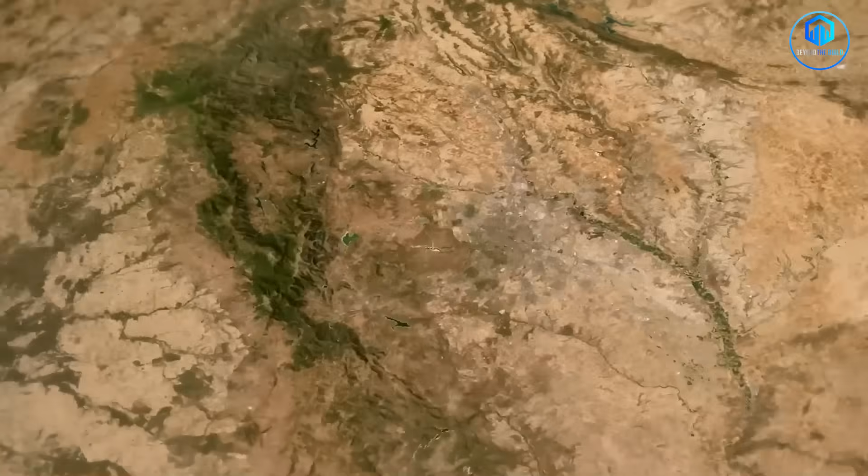Imagine stepping onto a high-speed train in Madrid and arriving in Casablanca just hours later. No flights, no ferries, just solid ground beneath your feet as you travel between two continents. This isn't fantasy. Spain and Morocco are bringing back one of the world's most ambitious tunnel projects, a $10 billion underwater passage that could change everything we know about travel between Europe and Africa.

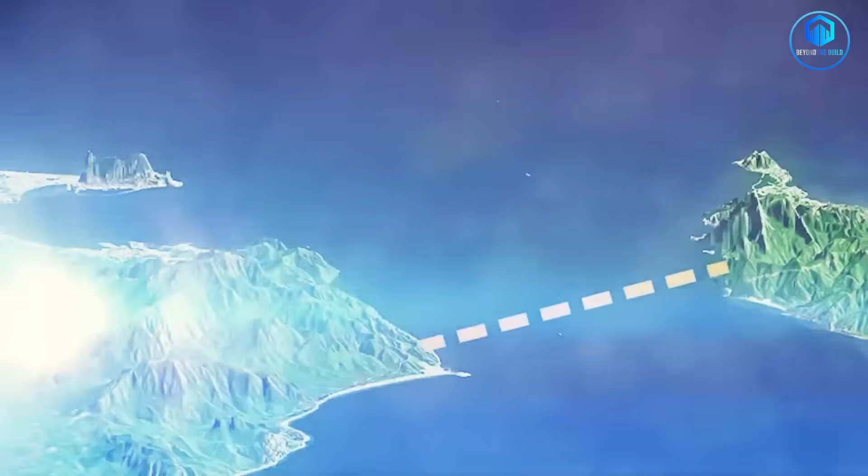Picture this, you're 475 meters beneath the Mediterranean Sea, deeper than the Empire State Building is tall. Above you, massive cargo ships cross one of the world's busiest shipping lanes. Around you, rock formations that have witnessed the collision of continents for millions of years. This is where Spain and Morocco want to dig the most challenging tunnel ever attempted.

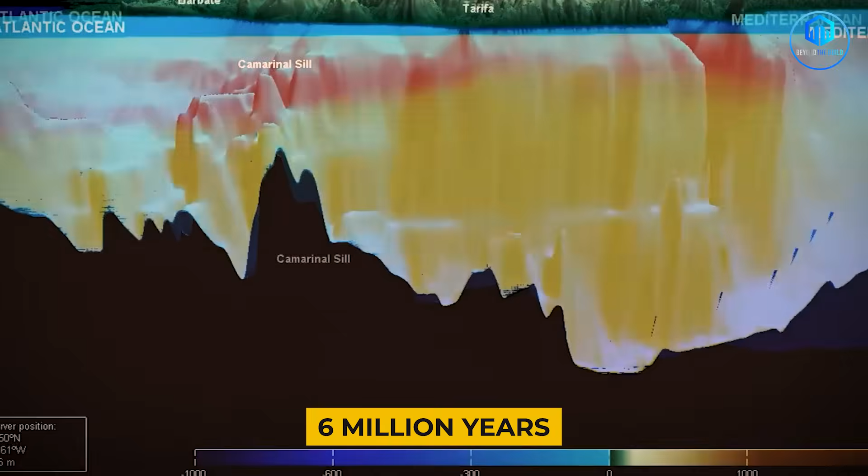The Gibraltar Strait sits at one of Earth's most geologically violent intersections. For the past 6 million years, the African and Eurasian plates have been grinding against each other here, creating a landscape of underwater mountains, deep trenches, and fault lines that stretch for hundreds of kilometers. The water itself tells the story. Atlantic currents flowing east meet Mediterranean currents flowing west, creating an underwater battlefield of competing forces.

Every day, over 300 ships navigate these waters. Oil tankers from the Middle East, container vessels from Asia, cruise ships packed with tourists. The strait ranks among the world's busiest shipping lanes, though it represents a smaller fraction of total global maritime traffic. Any tunnel must somehow coexist with this constant parade of massive vessels overhead.

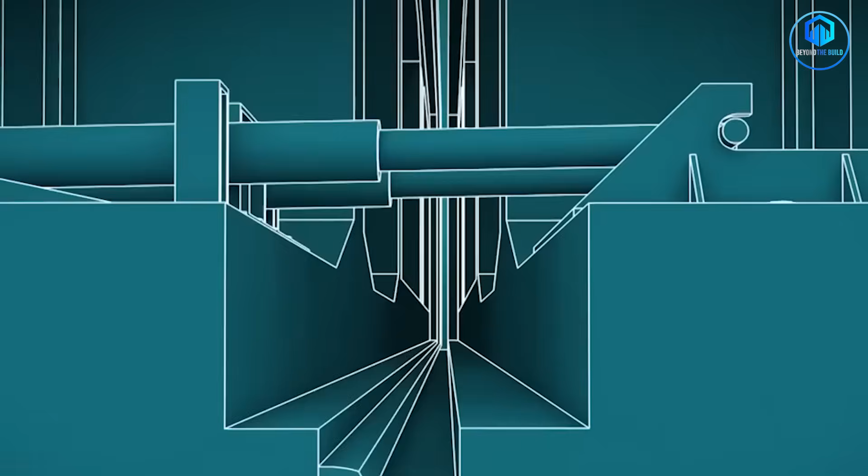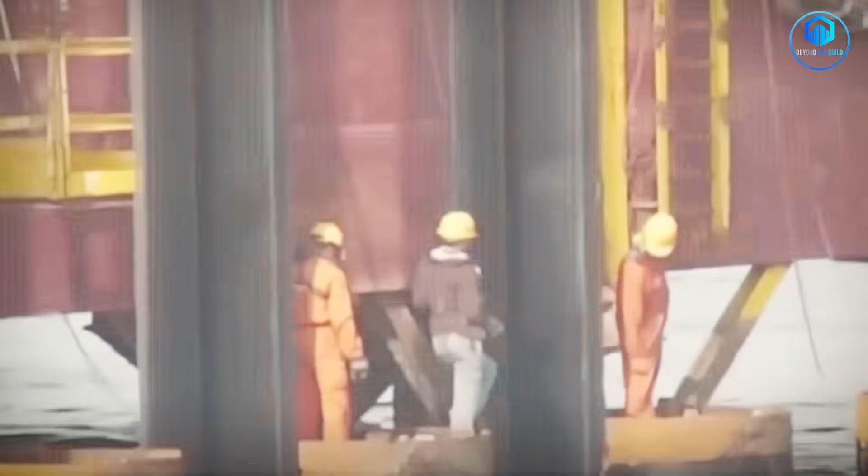The Gibraltar Strait Tunnel isn't new. Engineers have dreamed about connecting Europe and Africa since the 1930s. Back then, Spanish researchers discovered something that killed the project immediately. The rock beneath the strait was so hard that their equipment couldn't even scratch it. The geological surveys revealed layers of limestone and dolomite compressed over millions of years into formations harder than concrete.

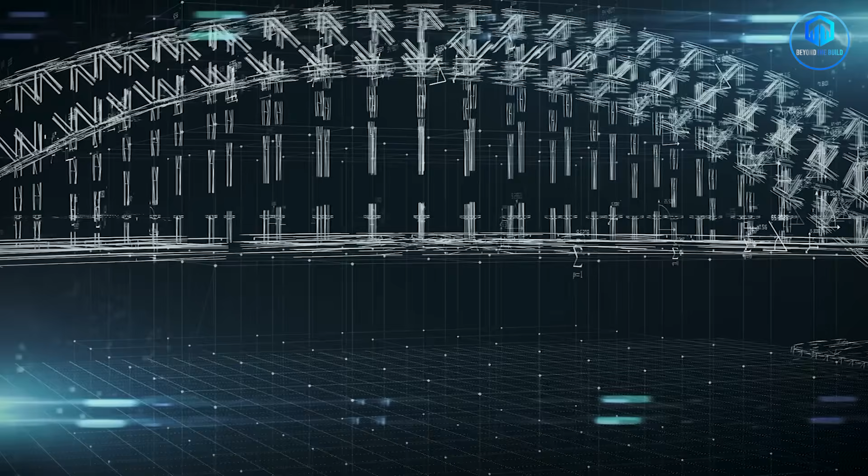Early planners considered alternatives. Some proposed a floating bridge with towers reaching nearly a kilometer into the sky. Others suggested an immersed tunnel, prefabricated sections lowered into a trench on the seafloor. Every option faced impossible challenges. The depths were too extreme. The seismic activity too unpredictable. The marine traffic too dense.

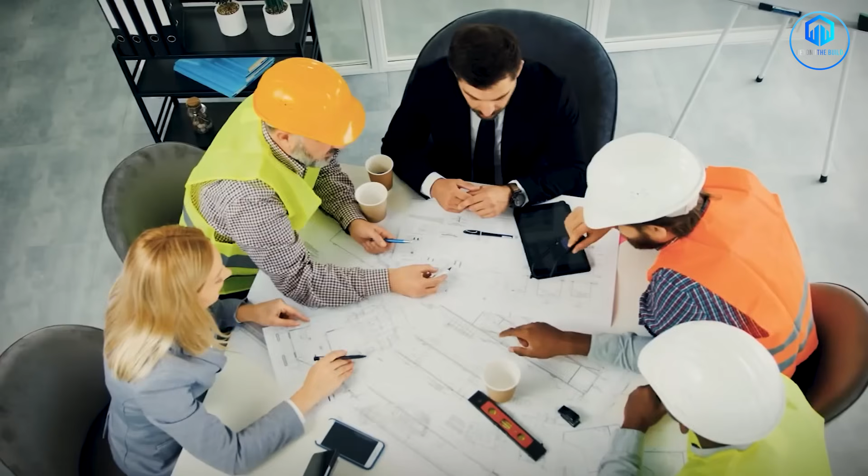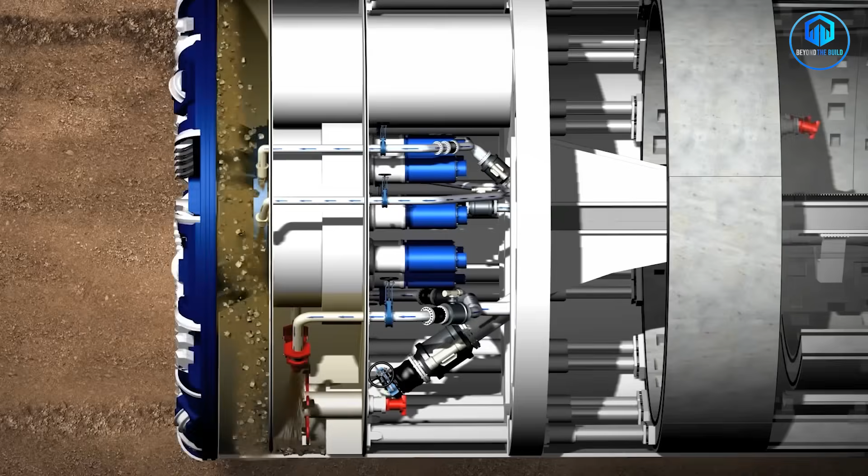They gave up. But nearly a century later, the dream is back, and this time they might actually have the technology to make it happen. Modern tunnel boring machines can cut through rock formations that would have destroyed 1930s equipment. Computer modeling can predict geological conditions with precision that early engineers couldn't imagine. Most importantly, successful underwater tunnels now exist as proof that the impossible can become routine.

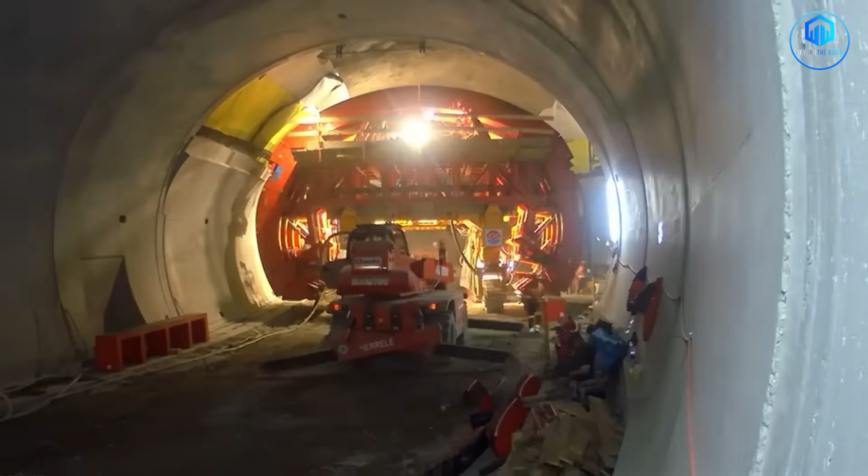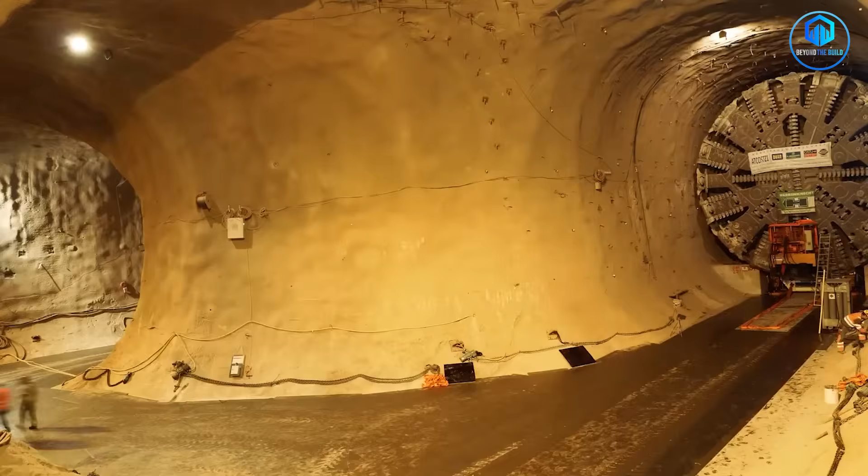Here's what makes this project absolutely insane. The English Channel Tunnel, which everyone calls impossible when it was built, sits just 75 meters below sea level. The Gibraltar Tunnel will go 6 times deeper at 475 meters maximum depth. While the Channel Tunnel dealt with soft chalk that was relatively easy to dig through, Gibraltar forces engineers to bore through some of the hardest rock on Earth.

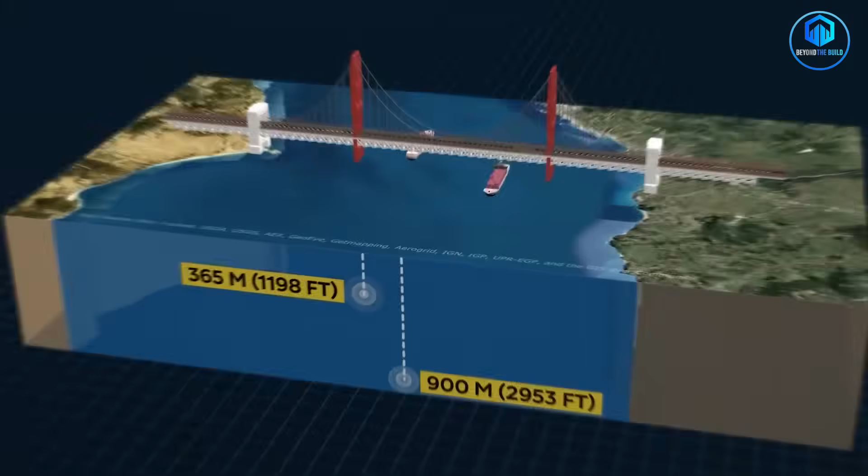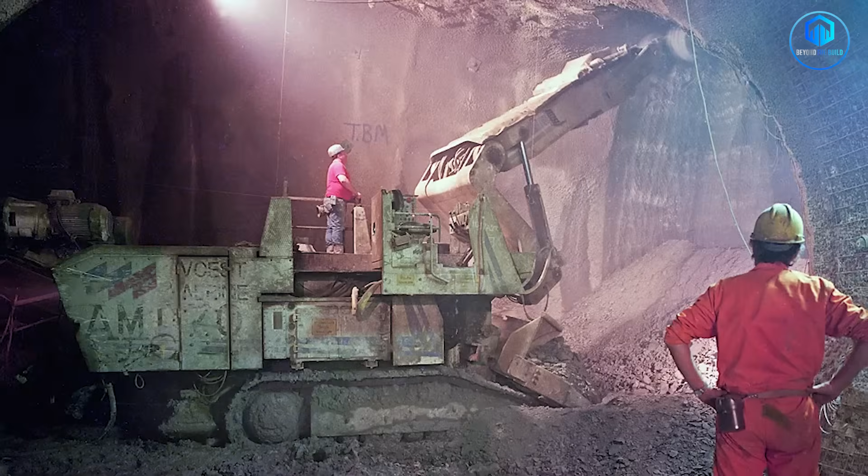The strait itself reaches depths of 900 meters, but the tunnel route carefully avoids these deepest sections. The numbers are staggering. 2 parallel tunnels, each around 28 kilometers for the underwater section, with total tunnel length reaching 38 to 42 kilometers, including land approaches. That's like building the Channel Tunnel underwater, but making it shorter while going much, much deeper.

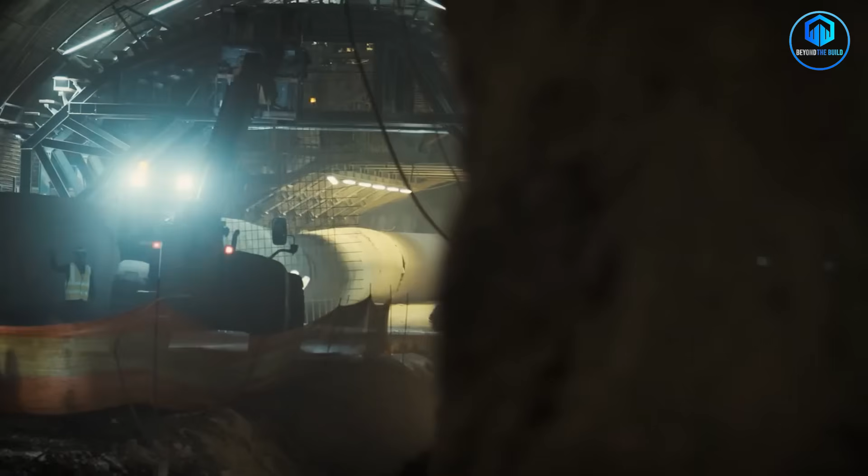The maximum depth hits 475 meters below sea level, deeper than most skyscrapers are tall. At those depths, the rock pressure is enormous. The temperatures climb higher than surface levels. Every meter forward becomes a battle against the planet itself.

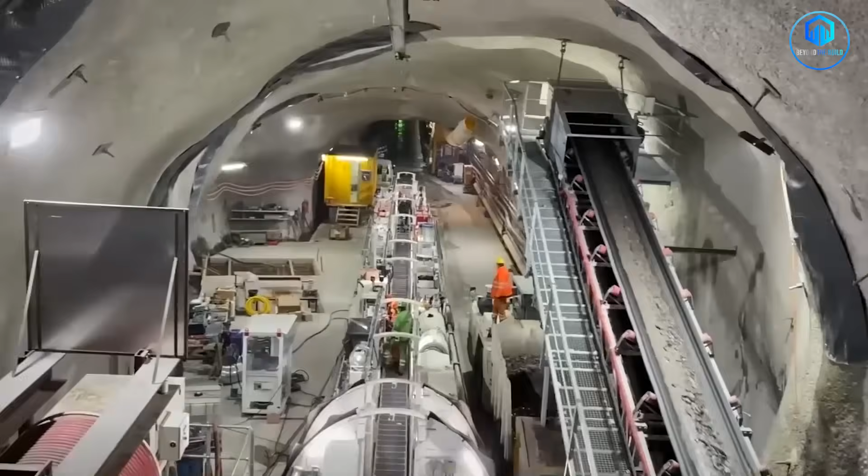Engineers estimate they'll need to excavate millions of cubic meters of rock and sediment. That's enough material to fill thousands of Olympic swimming pools. All of this debris must be transported to the surface through shafts that themselves represent major engineering challenges. The logistics alone boggle the mind.

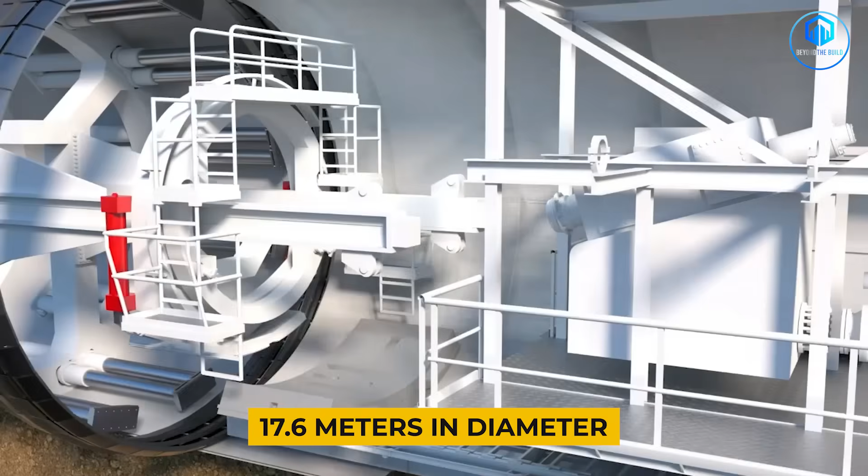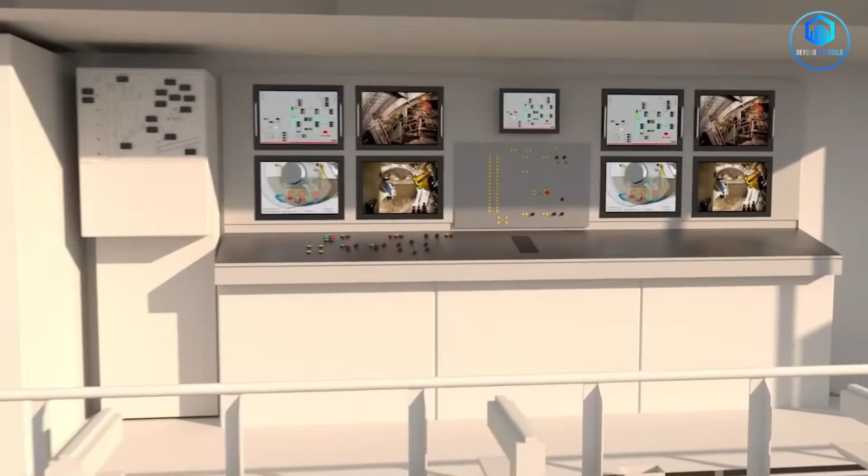The tunnel boring machines required for this project will be among the largest ever built. Current technology maxes out at around 17.6 meters in diameter for the largest machines currently in operation. Gibraltar's planned tunnels will use machines measuring approximately 7.9 meters in diameter, large but within current technological capabilities. These mechanical beasts would still weigh thousands of tons and cost hundreds of millions of dollars each.

But depth isn't even the worst problem. The Gibraltar Strait sits on one of Europe's most dangerous geological features, the Azores-Gibraltar Transform Fault. This isn't just any crack in the earth. This massive fault system stretches over 600 kilometers from the Azores Islands to the coast of Morocco. It represents the active boundary where three tectonic plates, African, Eurasian, and Iberian, meet and grind against each other.

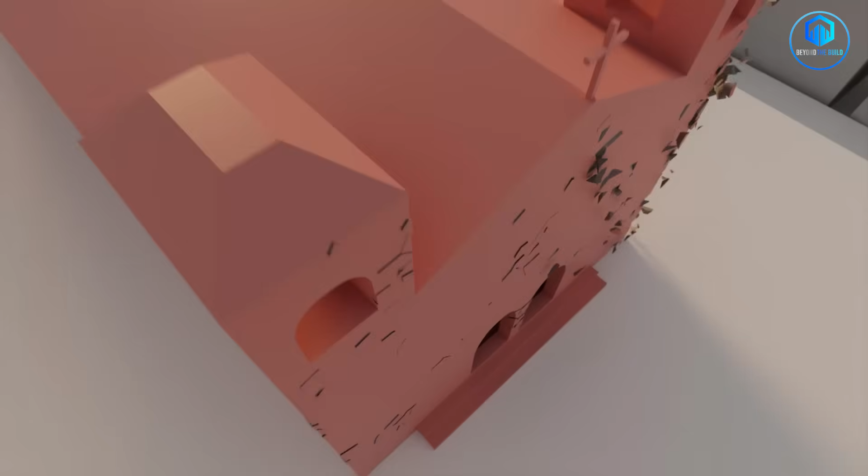This fault line produced the devastating 1755 Lisbon earthquake, one of the most powerful quakes in recorded European history. Contemporary accounts describe church bells ringing across Europe from the vibrations. The tremor was so massive that people felt it as far away as Hamburg and even Finland. Lakes in Scotland reportedly sloshed back and forth for hours after the main shock.

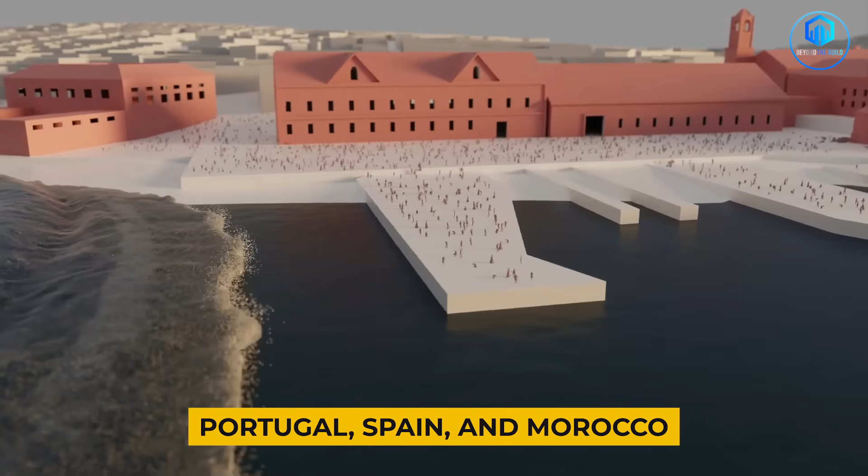The resulting tsunami wiped out entire coastal communities across Portugal, Spain, and Morocco. Wave heights reached 15 meters in some areas, taller than a 4-story building. The port city of Lagos in Portugal was partially destroyed, and Lisbon's royal palace disappeared beneath the waves. Modern estimates suggest between 40,000 and 50,000 people died across the region, though some reports put the toll even higher. The fault remains active today.

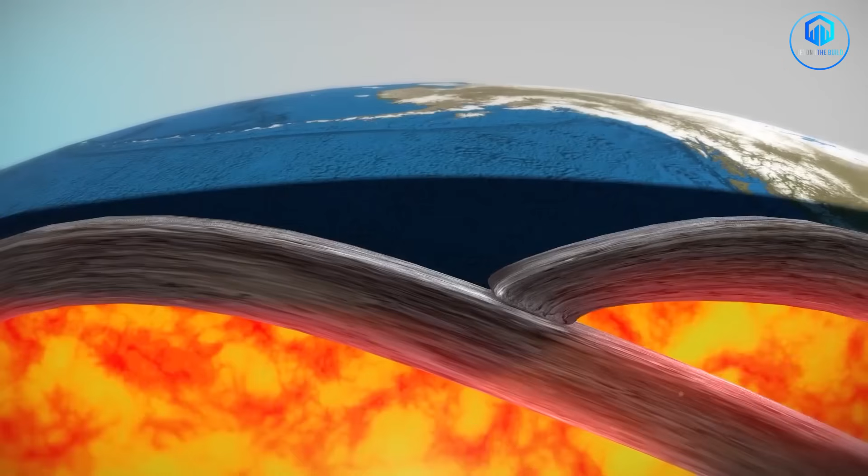Seismic monitoring stations track regular movements as the African and Eurasian plates slowly grind against each other at about 4 millimeters per year. That might sound tiny, but over the decades it takes to build a tunnel, those forces add up.

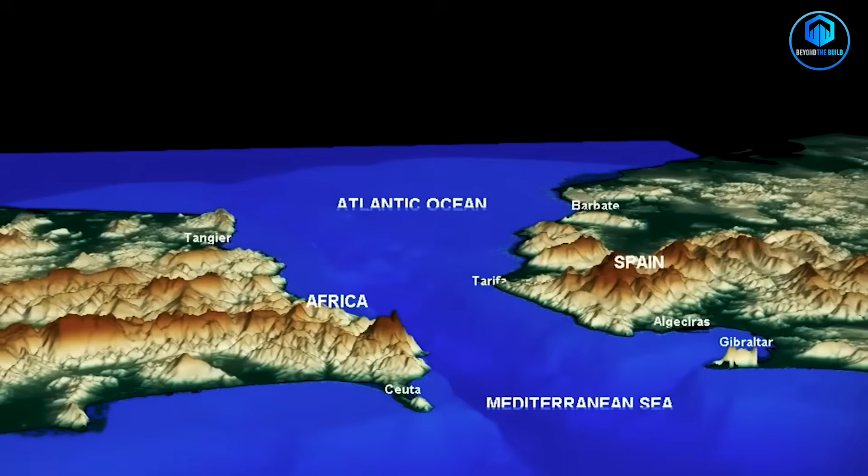Then there's the water problem. The strait connects two different seas, the Atlantic Ocean and the Mediterranean Sea. Cold Atlantic waters constantly flow eastward, while warm Mediterranean waters flow westward, creating powerful underwater currents that reach speeds strong enough to knock diving equipment off course. Building tunnel sections in these conditions requires precision never attempted at such depths.

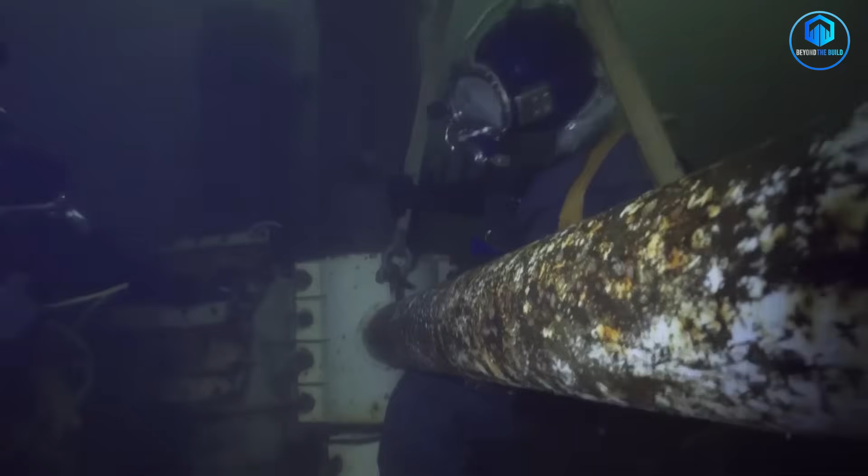Marine life adds another layer of complexity. The strait serves as a critical migration corridor for whales, dolphins, and countless fish species. Sperm whales dive to depths of 1,000 meters here, hunting for giant squid in the deep trenches, and pilot whales travel in pods of hundreds. Any construction activity must account for these sensitive ecosystems.

The underwater topography resembles an alien landscape. Steep underwater cliffs drop into abyssal plains, and rocky pinnacles rise like underwater mountains. The Camarinal Sill, an underwater ridge that separates the Atlantic from the Mediterranean, reaches depths of only 280 meters at its shallowest point. This ridge controls the water flow between the seas and represents one of the most challenging sections for tunnel construction.

Spanish and Moroccan governments officially launched this project back in 1979 when their kings signed an agreement to strengthen relationships between Europe and Africa. Two state companies formed, SECEGSA in Spain and SNED in Morocco. They spent millions on studies throughout the 1980s, but by 2009 the project died again. Too expensive, too risky, too complicated.

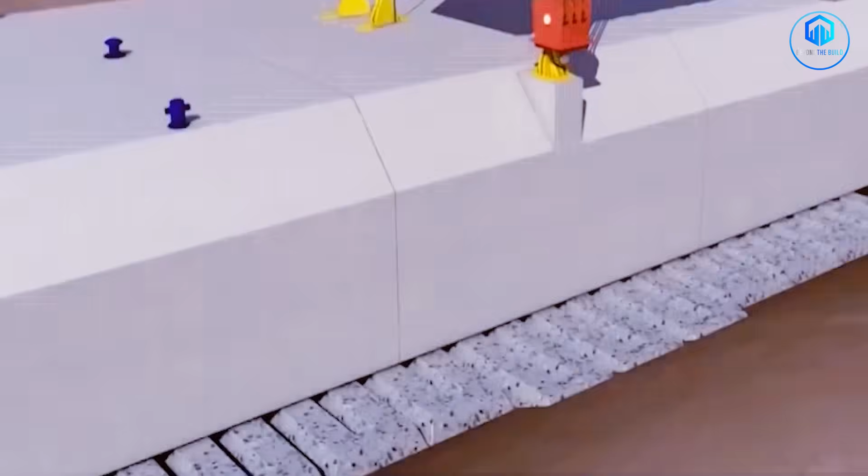What changed? The 2030 World Cup. Morocco, Spain, and Portugal will co-host the first World Cup ever held across 2 continents. Suddenly, connecting Europe and Africa by land became more than an engineering fantasy. It became a political necessity, tourism revenues, national pride, global attention. However, the tunnel will not be ready for the 2030 World Cup. Current projections put completion at 2040 or later.

The numbers are compelling. FIFA estimates that the 2030 World Cup could attract over 5 million international visitors across the 3 host countries. Traditional travel between Spain and Morocco involves either flying or taking ferries across the strait. Flights require airport transfers, security delays, and weather-dependent schedules, while ferries take 35 minutes for the crossing but require additional time for vehicle loading and port procedures.

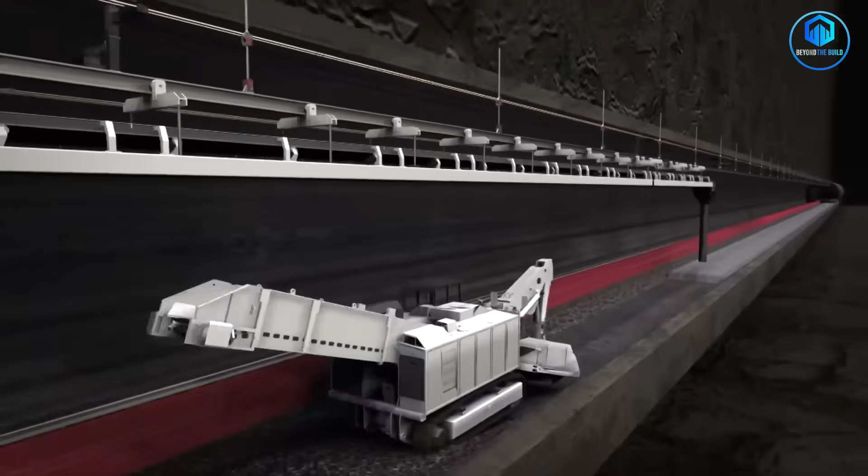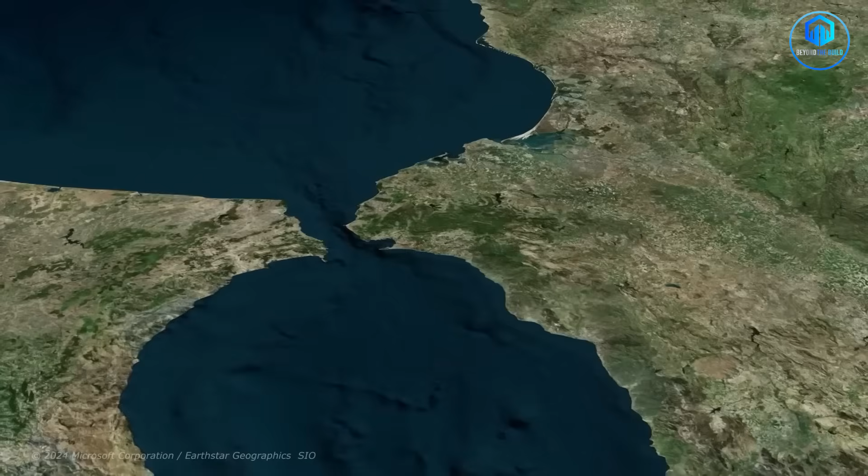While the tunnel won't serve the 2030 World Cup, the tournament has created political momentum for the project. A high-speed rail tunnel would eventually revolutionize travel patterns between the continents. Journey times from Madrid to Casablanca could drop to under 4 hours, competitive with flying when you factor in airport delays.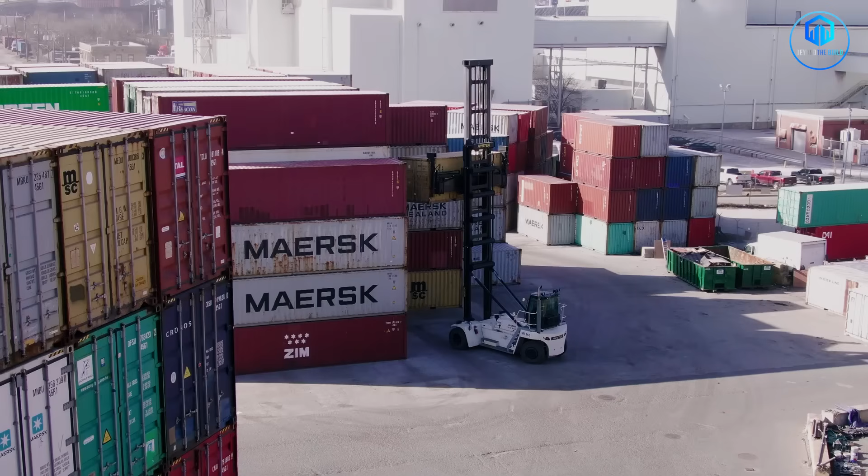The economic impact extends far beyond tourism. Spain and Morocco have been strengthening trade relationships for decades. Morocco now ranks as Spain's fastest-growing trade partner in Africa. Spanish companies have invested heavily in Moroccan automotive manufacturing, renewable energy, and telecommunications. A direct rail link would accelerate these trends dramatically.

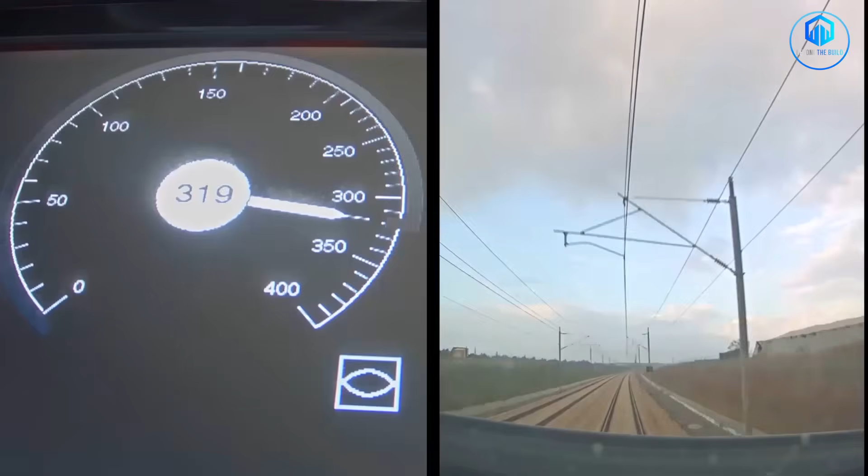Morocco's high-speed rail system changes everything. In 2018, Morocco launched Al Boraq, Africa's first high-speed train. These sleek machines hit 320 kilometers per hour, connecting Tangier to Casablanca in just over 2 hours. The journey that once took nearly 5 hours by conventional rail now happens faster than most people's morning commute.

Al Boraq represents more than just fast trains. The entire system was designed with European integration in mind. The trains use French TGV technology adapted for Moroccan conditions. The electrical systems operate on the same standards as Spain's high-speed network, and even the track gauge matches European specifications perfectly.

The investment was massive, over $2 billion for the initial 200-kilometer line, but the results speak for themselves. Al Boraq has transported over 6 million passengers since opening, with ridership growing steadily each year. Business travelers now routinely commute between Morocco's major cities, and tourists can easily visit multiple destinations in a single trip.

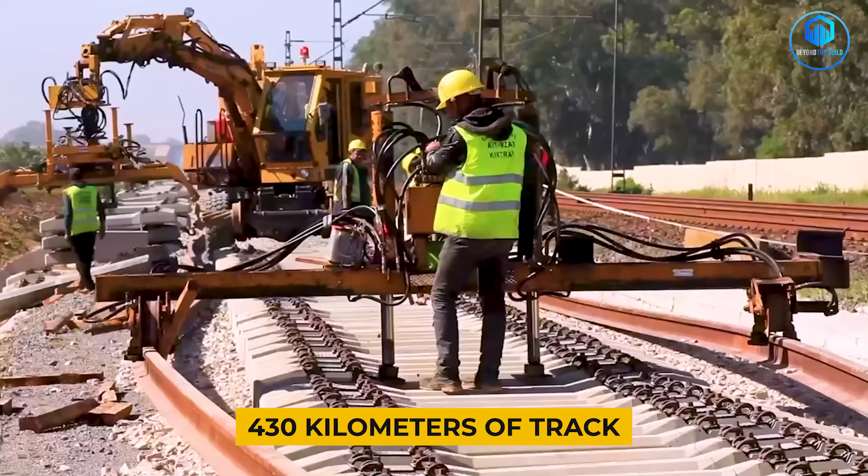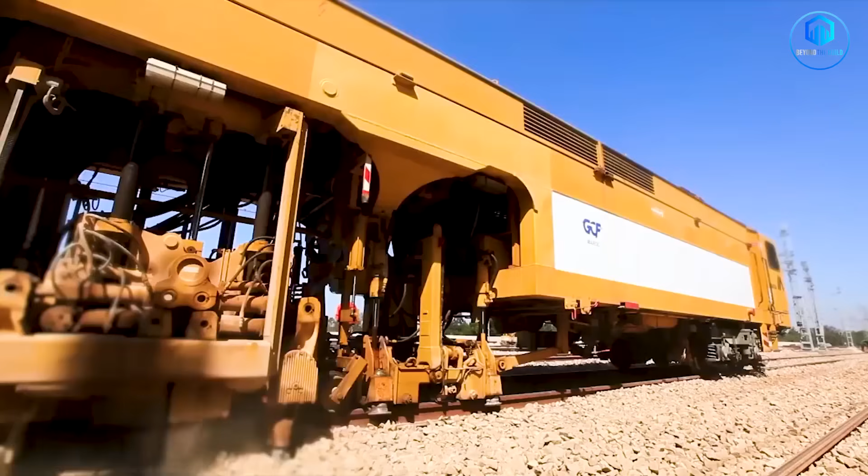Current expansion plans are even more ambitious. Morocco is extending the high-speed line south to Marrakesh by 2029, adding another 430 kilometers of track. Eventually, the network could reach all the way to Agadir on the Atlantic coast, creating a 1,500-kilometer high-speed rail system spanning the entire country. Al Boraq uses the same electrical systems and track gauge as Spain's high-speed network.

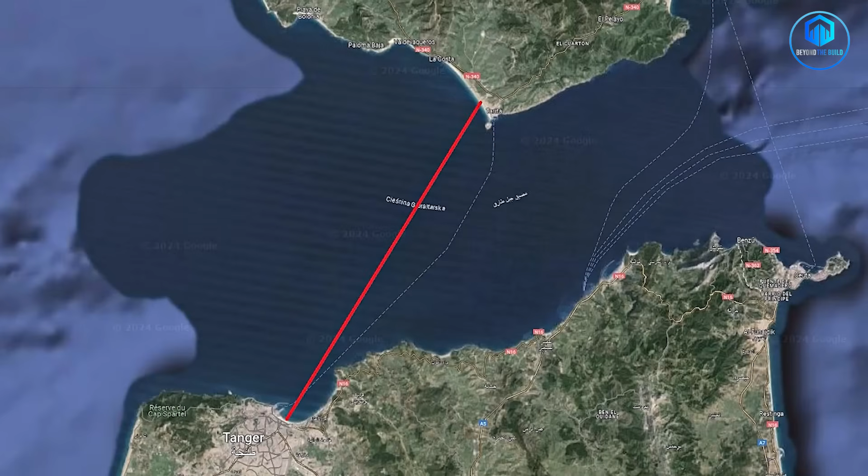That's not a coincidence. Moroccan planners always intended their trains to eventually cross into Europe. The infrastructure already exists on both sides—the tunnel just needs to connect them. Current plans call for the tunnel to link Punta Paloma in southern Spain with Malabata near Tangier in Morocco, avoiding the deepest parts of the strait while providing the shortest possible crossing. Trains would carry both passengers and vehicles, similar to the Channel Tunnel's shuttle service.

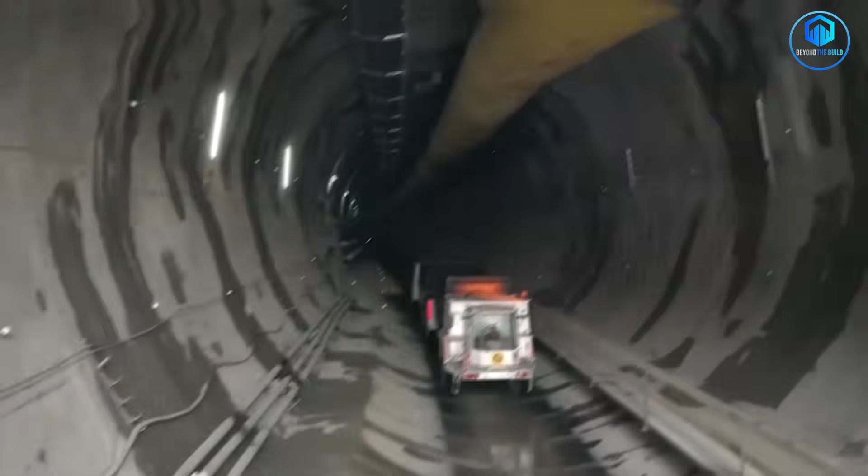But let's talk about what this really means. The tunnel would create the first permanent land connection between Europe and Africa since the continents separated millions of years ago. Trade routes that currently depend on slow maritime shipping could switch to rapid rail transport. A container leaving Morocco could reach Berlin faster than current sea routes reach London.

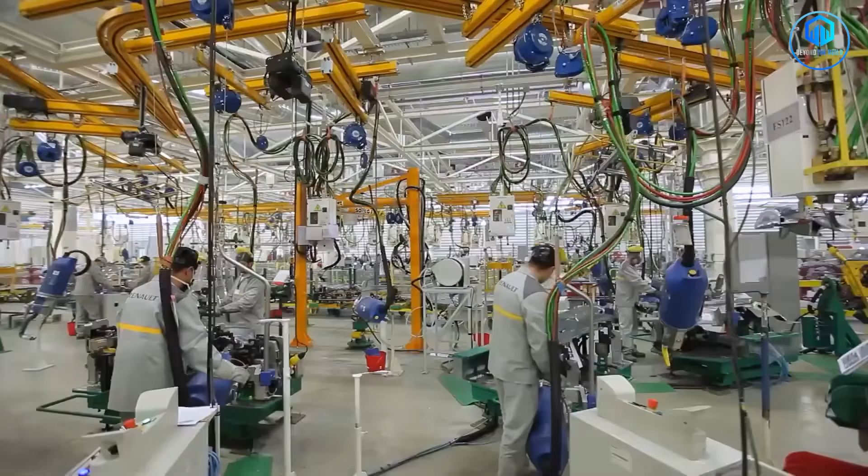The economic possibilities are massive. Morocco serves as a gateway to all of Africa. The country has become a major automotive manufacturing hub, producing car parts for European brands like Renault, Peugeot, and Ford. Moroccan factories now export over $10 billion worth of automotive products annually. With a direct rail link, these factories could integrate even more closely with European supply chains.

Agriculture represents another huge opportunity. Morocco produces citrus fruits, vegetables, and other crops that European markets demand year-round. Currently, these products travel by truck to ports, then by ship to European destinations. A rail tunnel could cut transport times dramatically while reducing costs and environmental impact.

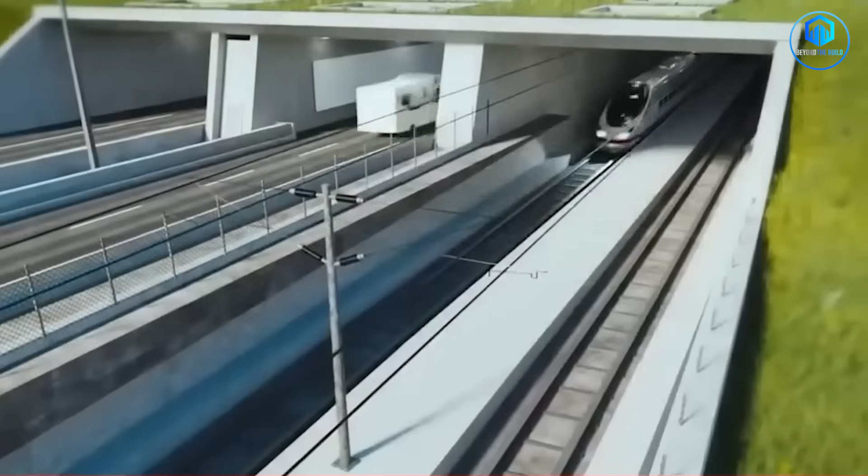The logistics industry is already preparing for this transformation. Major shipping companies are studying how a Gibraltar tunnel would affect their European-African routes. Some predict that rail transport could capture 30% or more of current maritime cargo volumes on certain routes.

Tourism works both ways. European visitors could easily explore Morocco's imperial cities—Marrakesh, Fez, Casablanca—without the hassle of airports or ferry terminals. Weekend trips to Marrakesh from Madrid could become as common as Paris to London excursions. Meanwhile, North African tourists could access Europe's attractions with unprecedented convenience.

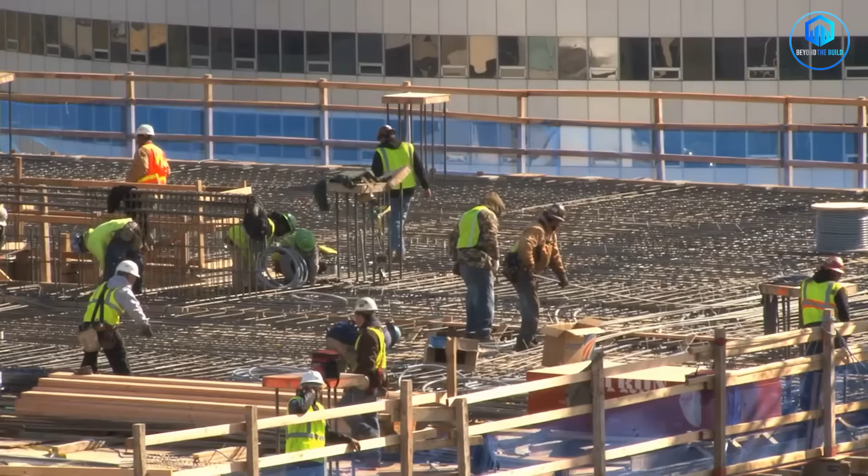The cultural implications are equally profound. A permanent land link would accelerate the exchange of ideas, languages, and traditions between continents. Students could easily study abroad. Workers could commute between countries. Families separated by the strait could maintain closer connections.

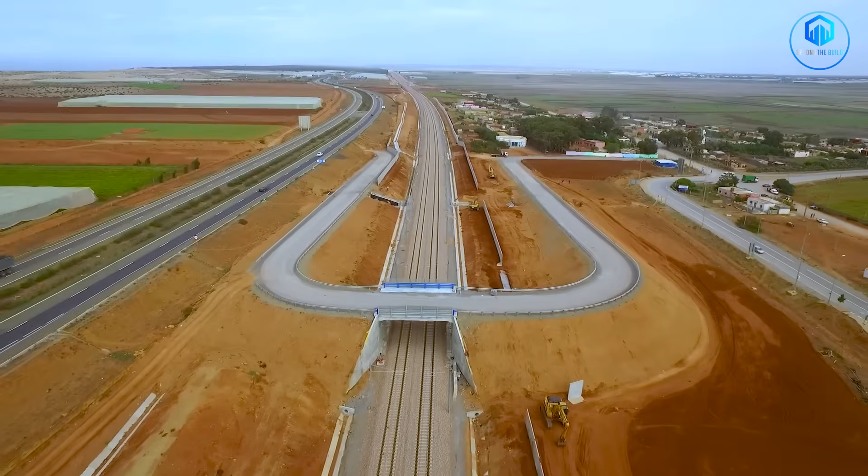Recent diplomatic developments make the tunnel more likely than ever. In late 2024, French President Emmanuel Macron visited Morocco for the first time in 6 years, signing agreements worth €10 billion. These deals specifically include expanding Morocco's high-speed rail network southward to Marrakesh, scheduled for completion before the 2030 World Cup.

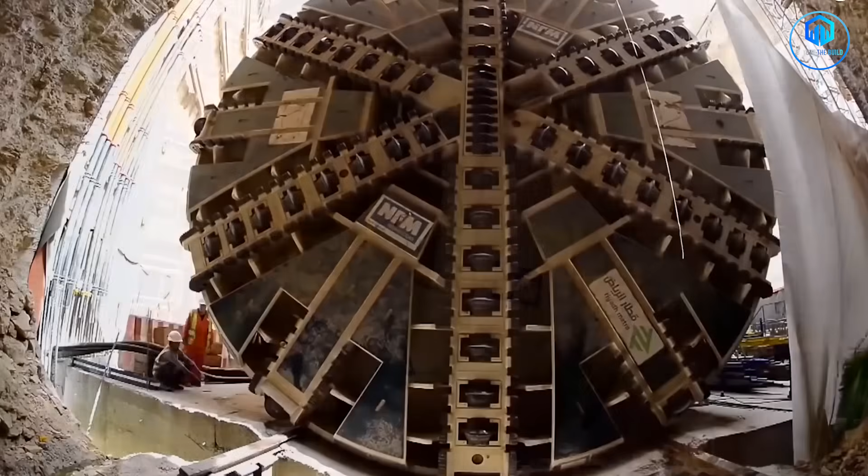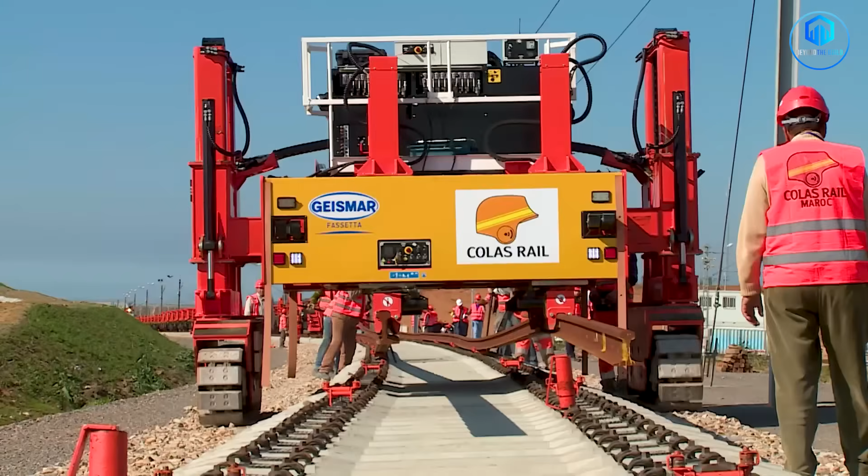Funding remains one of the biggest challenges. Unlike the Channel Tunnel, which was privately financed, the Gibraltar project will likely require massive government investment from both Spain and Morocco. The European Union has already contributed for feasibility studies, suggesting potential support for the full project. International development banks are watching closely. The African Development Bank and European Investment Bank both funded Morocco's Al Boraq high-speed line.

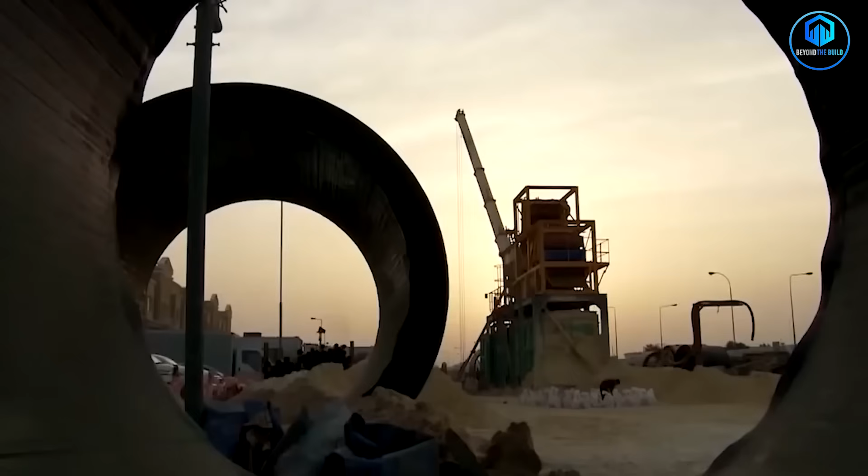These institutions could provide crucial financing for the tunnel project, especially given its potential to boost economic development across North Africa. Private investors are also expressing interest. Major construction companies like Bouygues, Vinci, and ACS have the expertise and financial resources to participate in such mega projects. The promise of decades-long operations and maintenance contracts makes the tunnel attractive despite the enormous upfront costs.

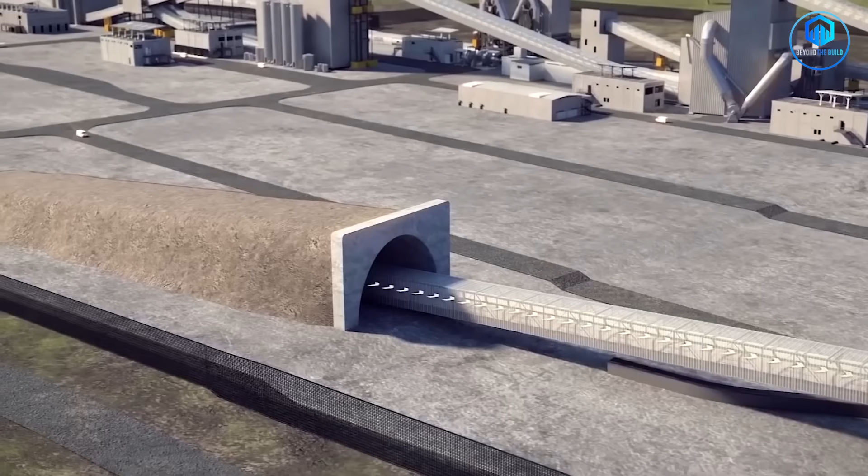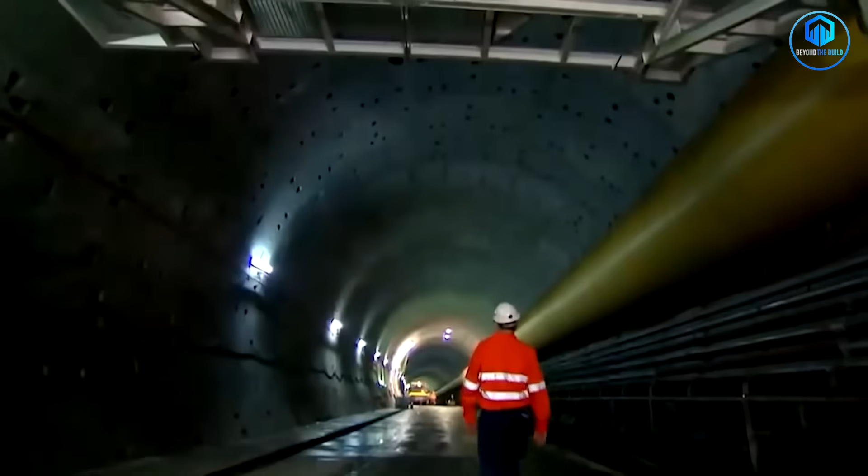The engineering challenges remain brutal. Swiss firm Lombardi Engineering, which helped design the Channel Tunnel, studied the Gibraltar project in 2006. Their conclusion? Technically possible, but far more complex than anything attempted before. The presence of two deep clay channels halfway across the strait complicates construction—these soft sediment layers could cause tunnel boring machines to get stuck or damaged.

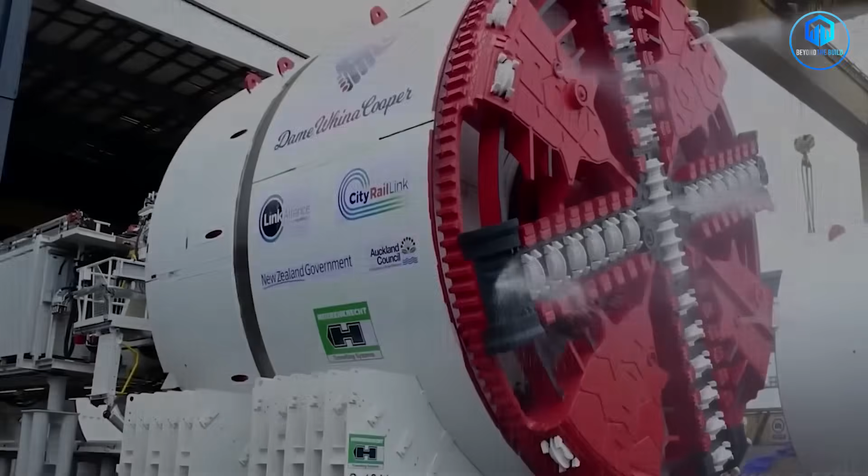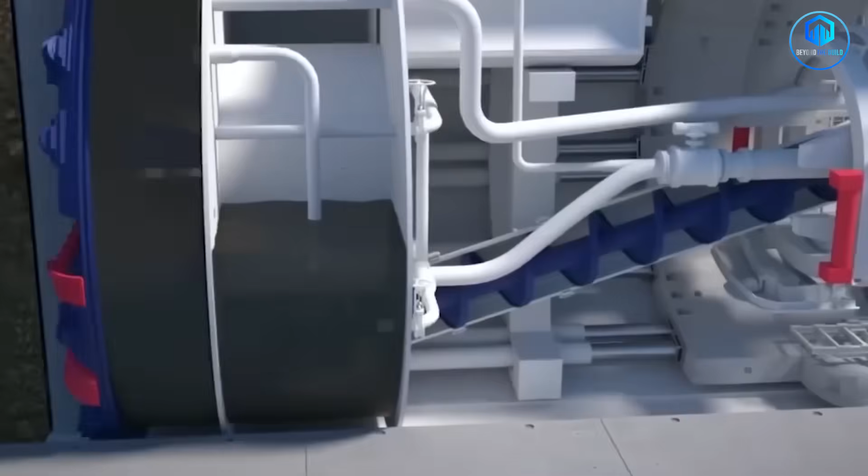Modern tunnel boring technology has advanced significantly since 2006. The latest machines include sophisticated ground-penetrating radar that can detect geological changes ahead of the cutting face. Computer-controlled steering systems can adjust the tunnel path in real time to avoid obstacles. Improved cutting tools can handle mixed geological conditions that would have stopped earlier machines.

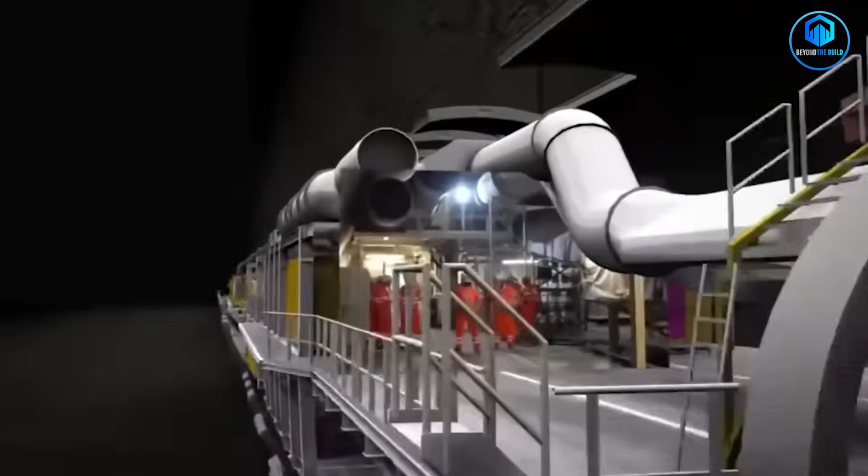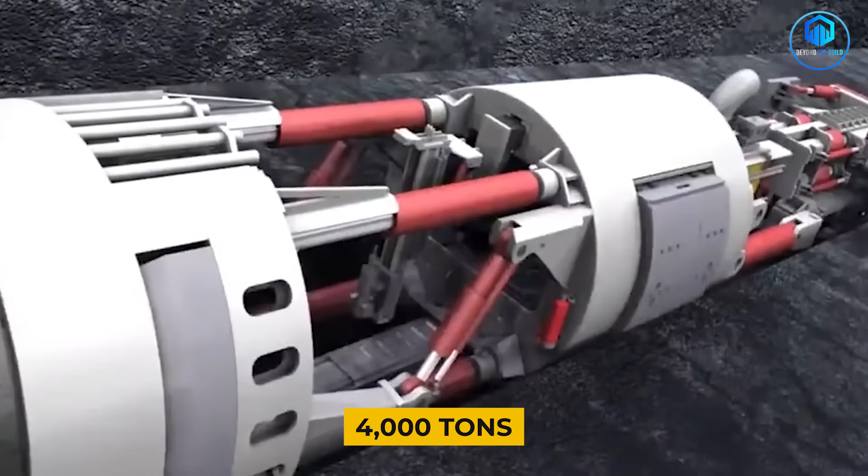The machines themselves are marvels of engineering. A typical tunnel boring machine for this project would measure around 7.9 meters in diameter and extend 200 meters in length, matching the technical specifications in current tunnel plans. These mechanical monsters weigh up to 4,000 tons and cost around 100 million euros each. They operate like underground factories, simultaneously excavating rock, installing concrete tunnel lining, and removing debris through conveyor systems.

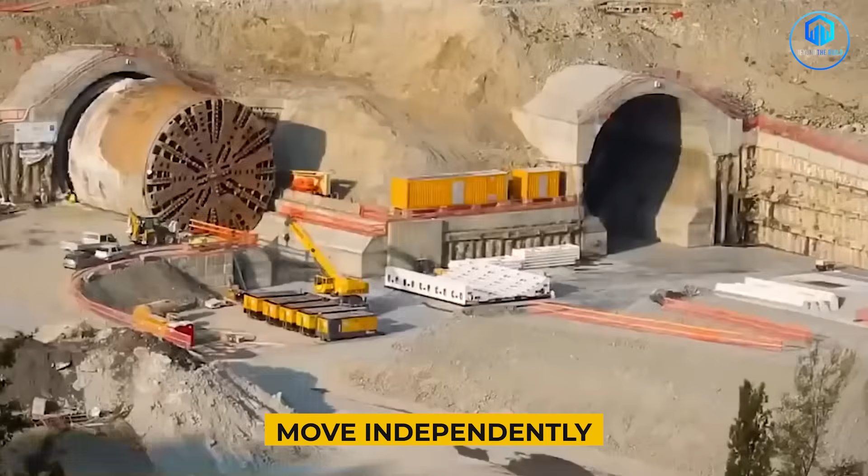Seismic activity requires entirely new approaches to tunnel design. Traditional rigid concrete tunnels would crack during earthquakes. Engineers are exploring flexible joint systems that allow tunnel sections to move independently—think of it like a giant underground snake that can bend without breaking. These joints must remain watertight while accommodating movements of several centimeters during major earthquakes.

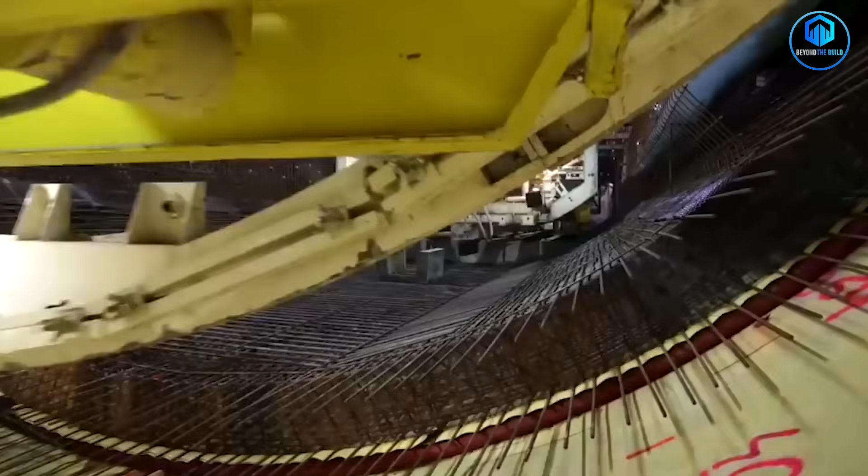Japanese engineers have pioneered many of these techniques in response to their country's frequent seismic activity. The Seikan Tunnel, which connects Japan's main islands, operates successfully in one of the world's most earthquake-prone regions. However, the Seikan Tunnel reaches maximum depths of only 240 meters, half the depth planned for Gibraltar.

Water pressure at maximum depth reaches levels that would crush conventional tunnel designs. The concrete walls need to be thick enough to withstand pressures equivalent to having several elephants standing on every square meter. Specialized waterproofing systems must prevent even tiny leaks that could gradually flood the tunnel.

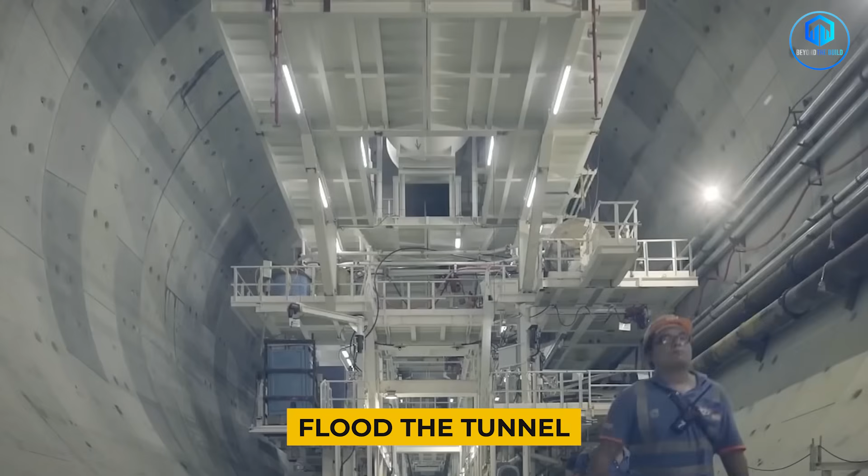Temperature management becomes critical at such depths. Rock temperatures rise significantly below ground. Add the heat generated by high-speed trains, electrical systems, and ventilation equipment, and the tunnel could become dangerously hot. Cooling systems must operate continuously to maintain safe conditions.

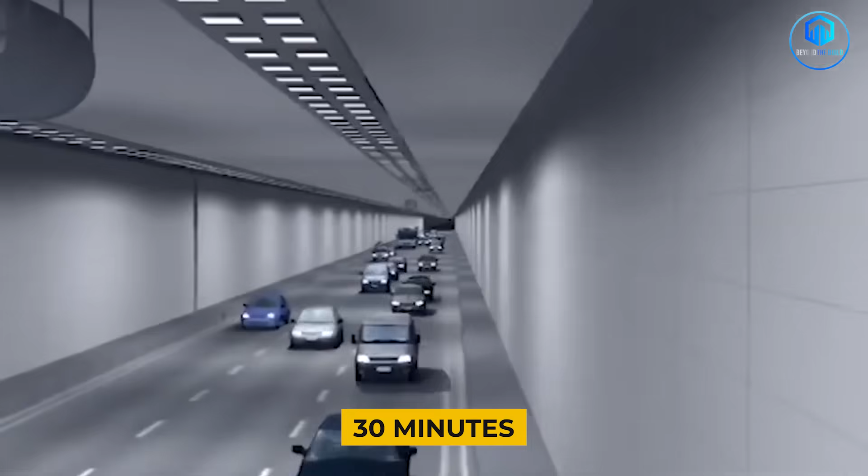Emergency procedures require completely new thinking. If something goes wrong in the Channel Tunnel, rescue teams can reach any point within 30 minutes. In the Gibraltar Tunnel, the deeper sections could take much longer to access. Escape routes, emergency chambers, and backup systems must account for the extreme environment.

Current construction timelines no longer target 2030. Recent reports suggest completion has slipped to 2040 or later, which is probably realistic given the enormous technical challenges. The Channel Tunnel took 6 years to build through relatively simple geology. Gibraltar's harsh conditions could easily extend that timeline significantly.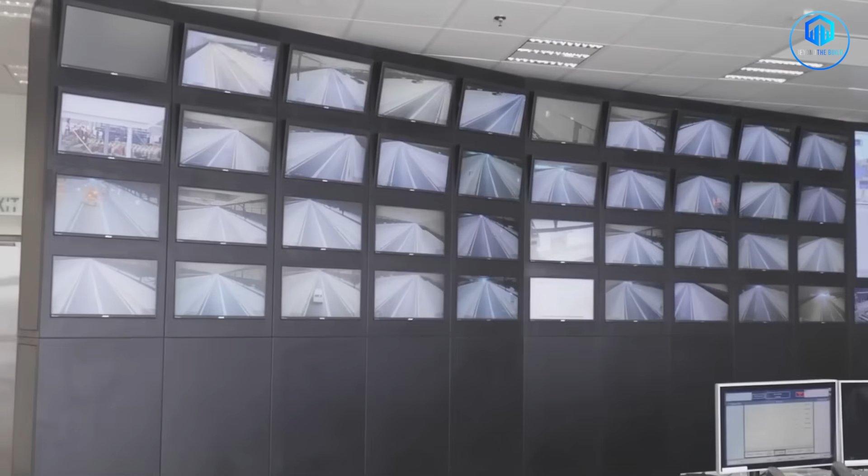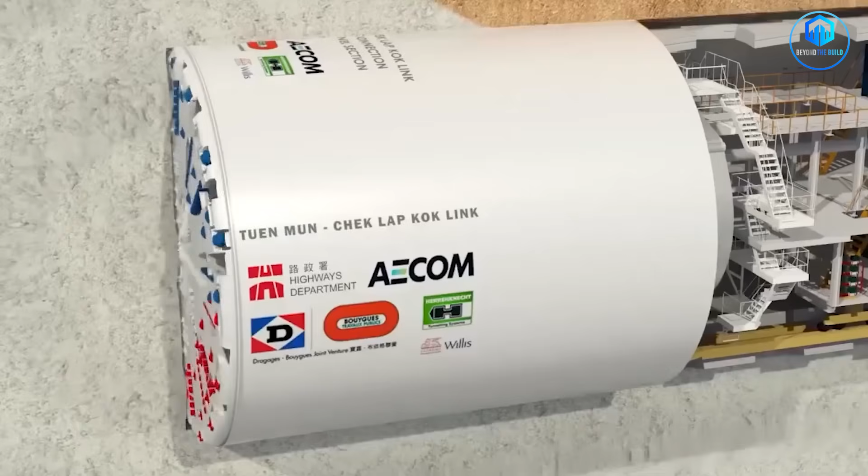The geopolitical implications extend far beyond transportation. A permanent link between Europe and Africa would fundamentally alter trade relationships and cultural exchange. European leaders see Morocco as a stable partner in an increasingly unstable region. The tunnel represents a massive bet on continued cooperation.

But criticism exists too. Environmental groups worry about disturbing sensitive marine ecosystems. The strait supports diverse wildlife, including migration routes for whales and dolphins. Construction activities could disrupt these patterns permanently.

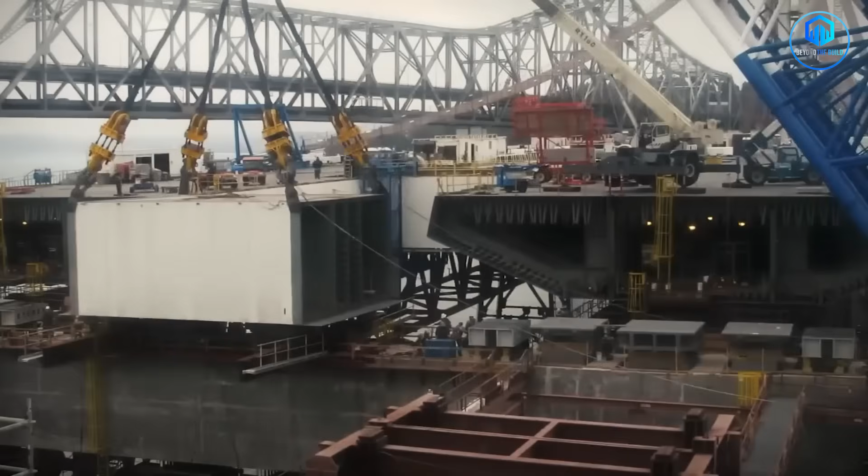Some economists question whether the tunnel makes financial sense. High-speed rail works best for distances between 200 and 800 kilometers. Beyond that range, aircraft become more competitive. Madrid to Casablanca covers about 900 kilometers, right at the edge of rail's effectiveness.

Security concerns also loom large. A permanent land connection between continents could facilitate illegal immigration or smuggling. Border controls would need to be absolutely airtight. Any security failure could undermine political support for the entire project.

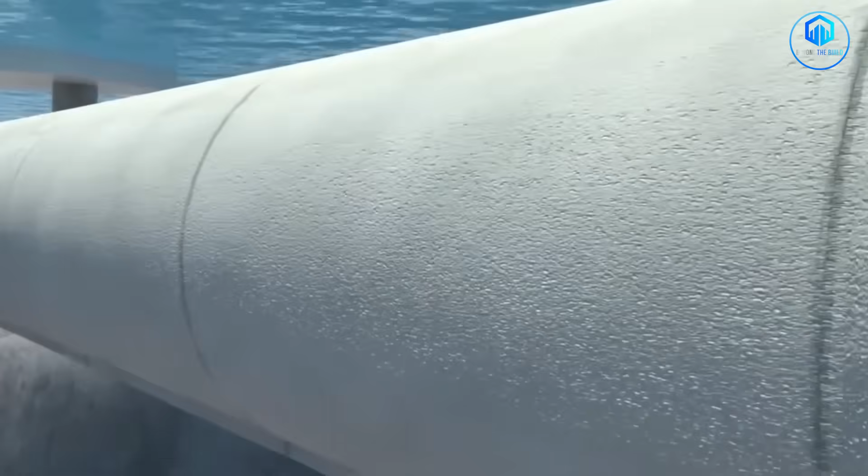Technical alternatives exist. Some engineers propose floating tunnels, underwater tubes anchored to the seabed but not buried beneath it. These structures could avoid the deepest rock formations while still providing a fixed crossing. However, floating tunnels have never been built at Gibraltar's scale or depth.

Bridge options remain technically impossible. The strait's 900-meter depth would require support towers taller than any structure ever built. The seismic activity and marine traffic make bridges completely impractical. If this crossing gets built, it will definitely be a tunnel.

Regional competitors are watching closely. Turkey is building massive infrastructure projects connecting Europe and Asia. Russia has discussed tunnels across various straits. China's Belt and Road Initiative includes multiple underwater crossings. The Gibraltar Tunnel represents Europe's answer to these ambitious connectivity projects.

Looking ahead, success depends on sustained political will from both governments. Megaprojects typically span multiple election cycles. New leaders must remain committed to their predecessors' visions. Economic crises, political instability, or diplomatic tensions could easily derail the project.

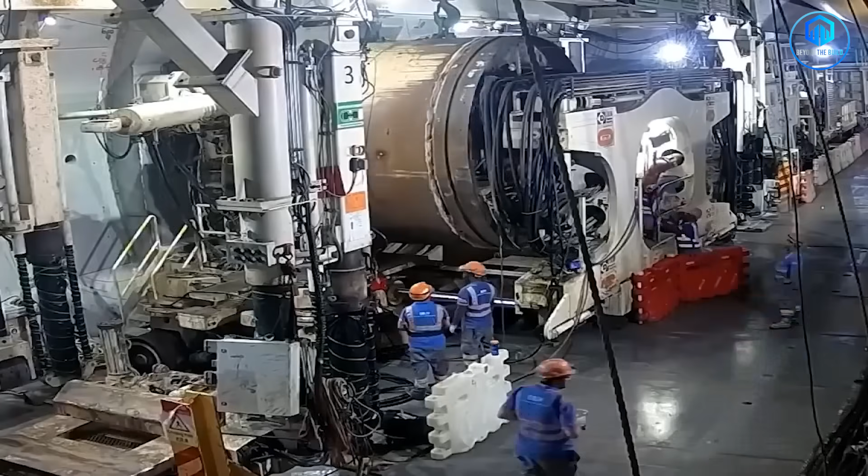Technical advances in tunneling technology improve the odds. Tunnel boring machines have become larger, more powerful, and more precise since the Channel Tunnel era. Computer modeling can predict geological conditions with unprecedented accuracy. These improvements might make Gibraltar's challenges manageable.

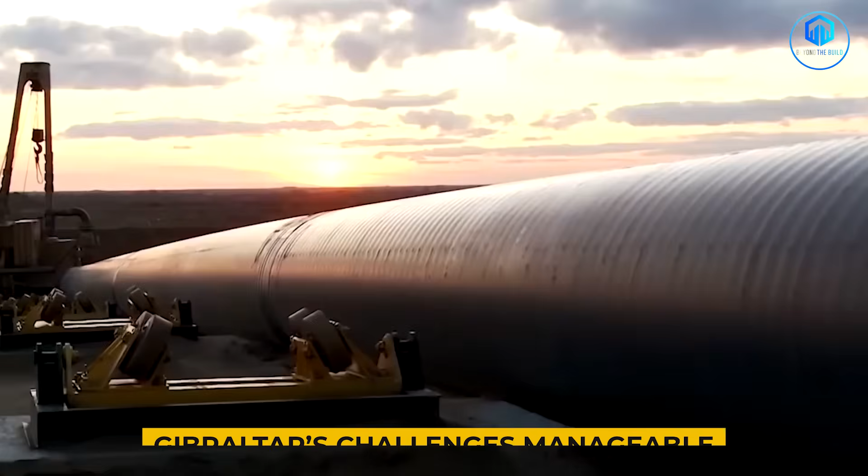The 2030 World Cup provides a firm deadline that concentrates minds and budgets. Major sporting events have historically driven infrastructure development. Japan built its bullet train network for the 1964 Olympics. China constructed massive transportation systems for the 2008 Olympics. Morocco, Spain, and Portugal have similar motivation for 2030.

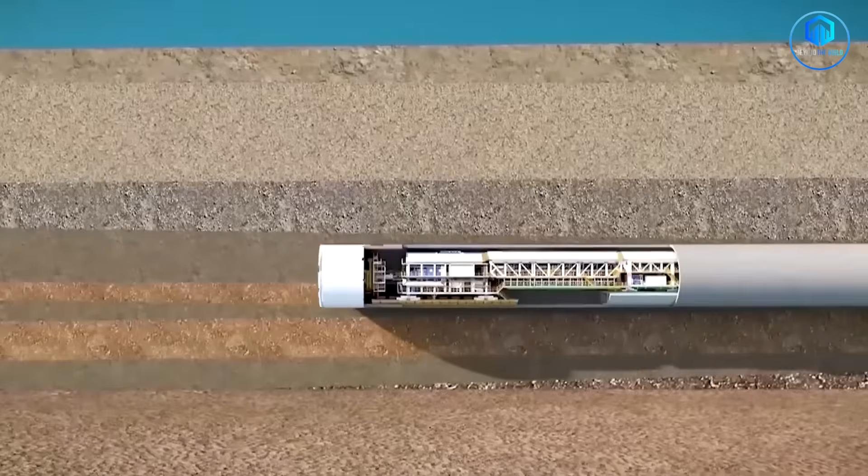Whether the tunnel actually gets built depends on factors beyond pure engineering. Political stability, economic growth, technological advances, and international cooperation must all align perfectly. The margin for error remains extremely thin.

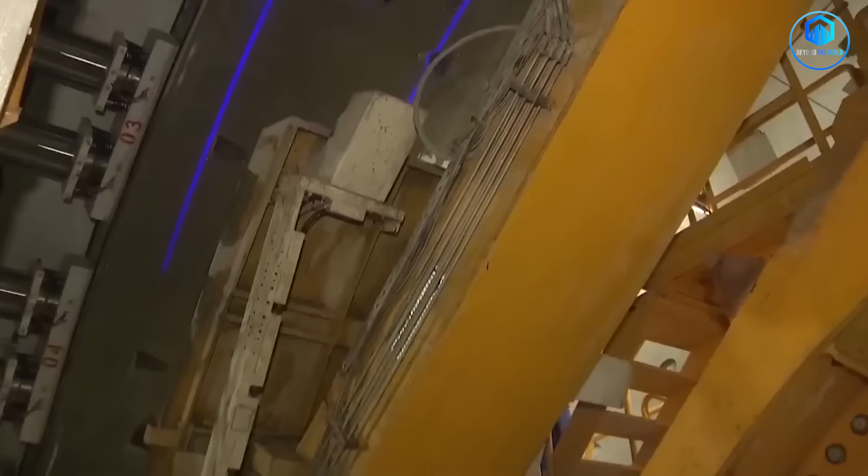Current feasibility studies project the tunnel could carry approximately 12.8 million passengers annually, though these remain estimates subject to change as the project develops. That's roughly the population of Belgium crossing between continents every year. Freight capacity projections suggest the tunnel could handle significant portions of Europe-Africa trade, though exact volumes depend on pricing and logistics arrangements. The economic impacts would ripple across both continents.

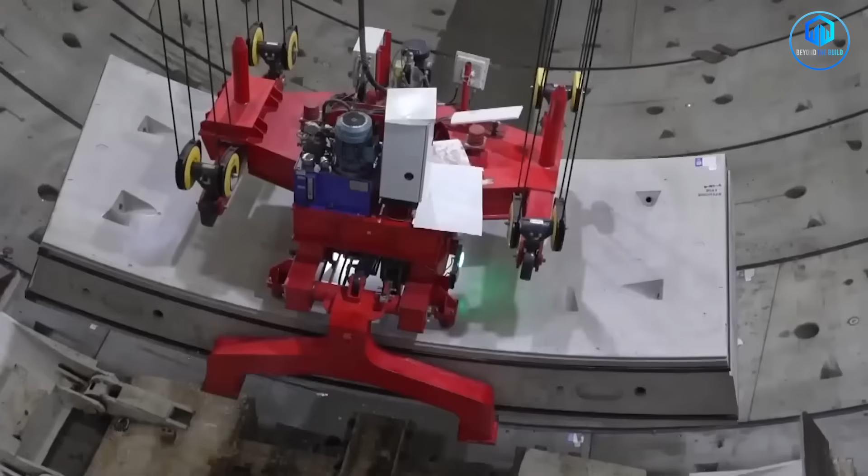But we've heard ambitious promises before. The 1930s studies promised a Gibraltar crossing within decades. The 1980s revival generated similar optimism. Previous generations of engineers couldn't deliver. This generation faces the same fundamental challenges, plus new complexities.

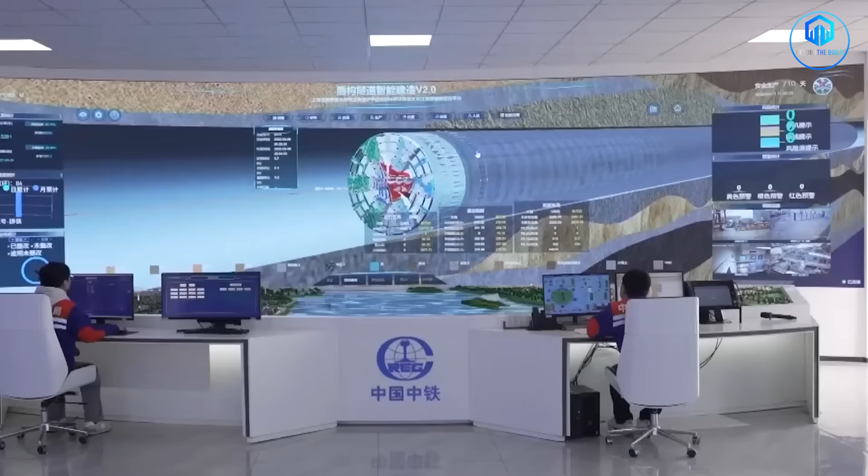The Gibraltar Tunnel represents a boldest attempt to reshape geography through engineering. Success would create the first permanent link between Europe and Africa since the continents separated. Failure would remind us that some barriers exist for good reasons. With just 5 years until the 2030 World Cup, we're about to discover whether modern technology can finally conquer one of Earth's most stubborn obstacles.

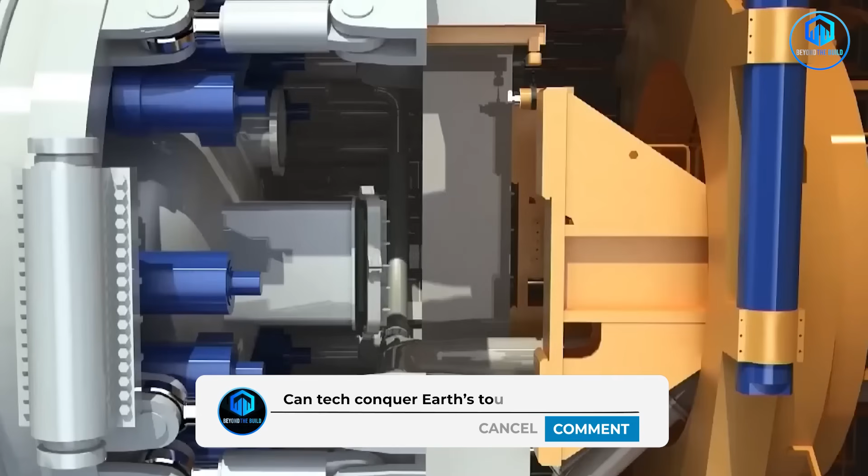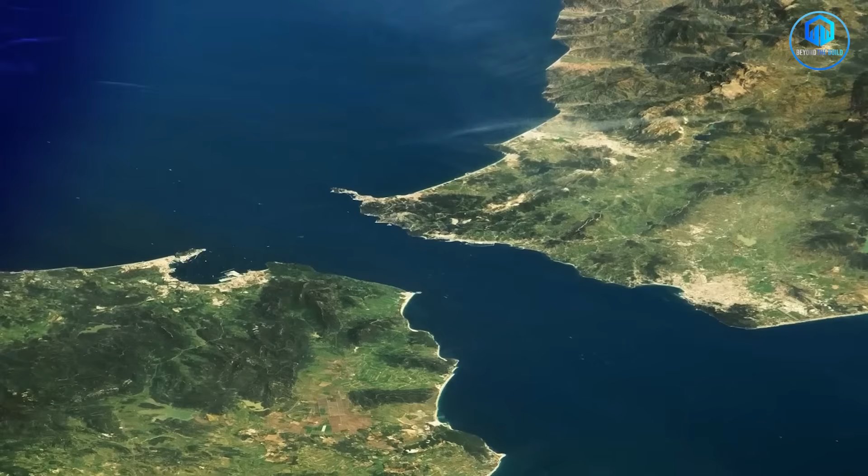The question isn't whether we can dig through 900 meters of rock beneath one of the world's most active seismic zones. The question is whether we should, because once you connect two continents, there's no going back.